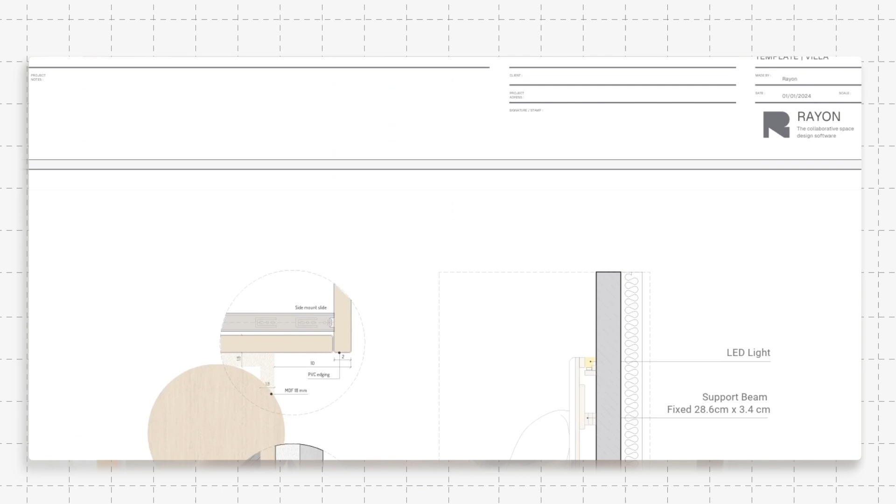So whether you're trying to sell your clients on your ideas, whether you're trying to describe to a millworker what exactly you want created, or if you need a full drawing set to send to the contractors, I can help you along this journey. I'm going to be going through a partial millwork drawing set, and we're going to be looking at the components of this drawing set. I'm going to show you the sections, I'm going to show you the mood boards, and I'm going to give you a little bit behind the scene actions when it comes from the perspective of bedroom millwork.

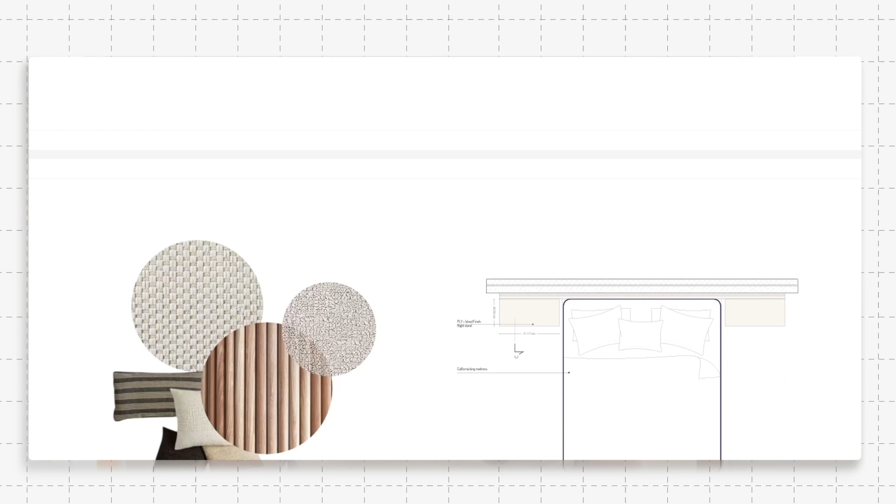Hi everyone, my name is Daniela and I'm a designer based in Toronto. However, I've taken on many different interior design projects around the world. So I like to say that I have a very holistic view on interior design in different spaces as well. And one of the most design sensitive areas in the home, no matter who you're dealing with, no matter what part of the world you're in, is the bedroom. You see, people obviously spend a lot of time in their bedroom. It's a very important place. And you can get really specific in some of the design choices.

So today we're talking about custom millwork. And that means the headboard, the nightstands, so that means different finishes. It could be different wood finishes. It could involve certain metal finishes. It could involve fabric selections. And you also have to think about the lighting. The lighting is very important in the bedroom to set different moods, as it is in any interior design. But we're going to be looking at the lighting specific to the nightstands. There are really cool options on the market these days.

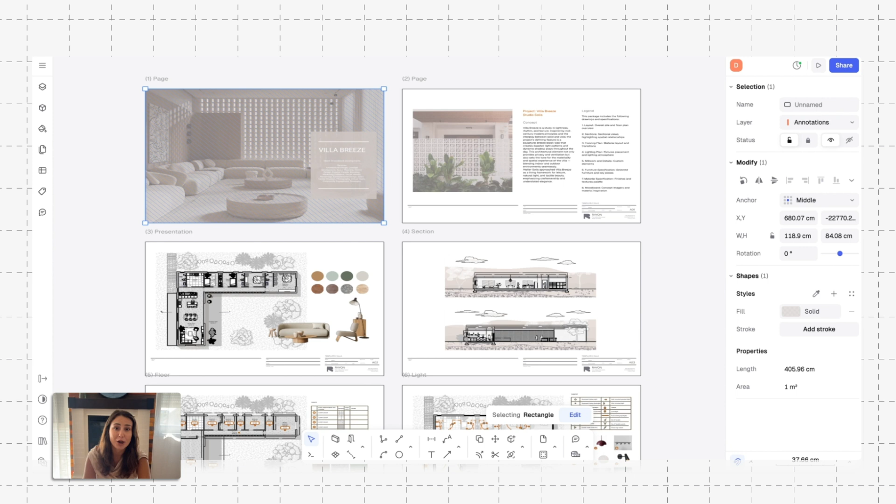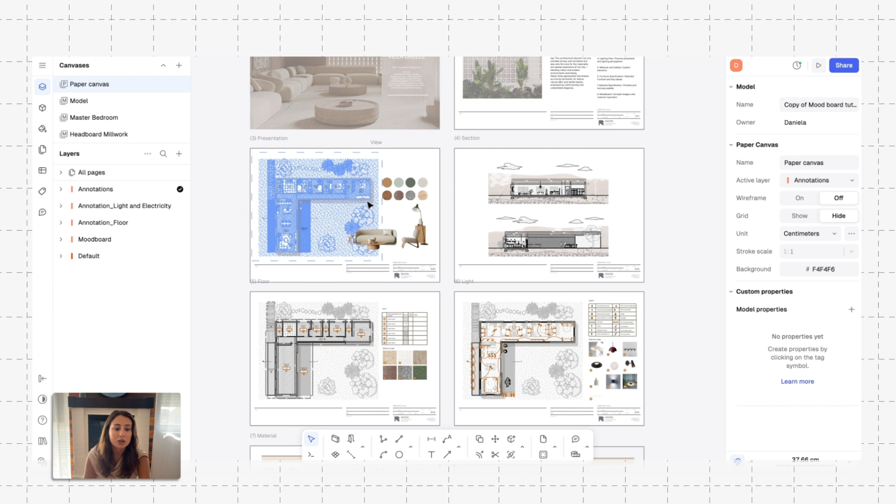Opens up the drawing package here. And while today we're going to be focusing on the bedroom millwork, I want to make note that this drawing set is actually a part of a larger interior design project. So you can see here, we go into our layers and we can see the different canvases that we're going to be looking at. And this first one is called paper canvas. And if you look through the pages here, you can see it follows a traditional drawing set. We have the cover page, we have the legend, and as you go on, you will see more and more detailed drawings. You can see material suggestions, and you can see some sort of style being hinted at.

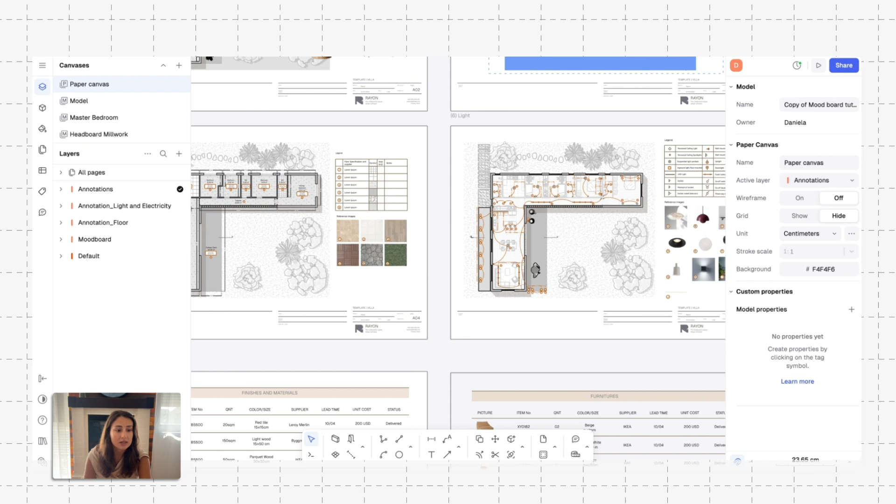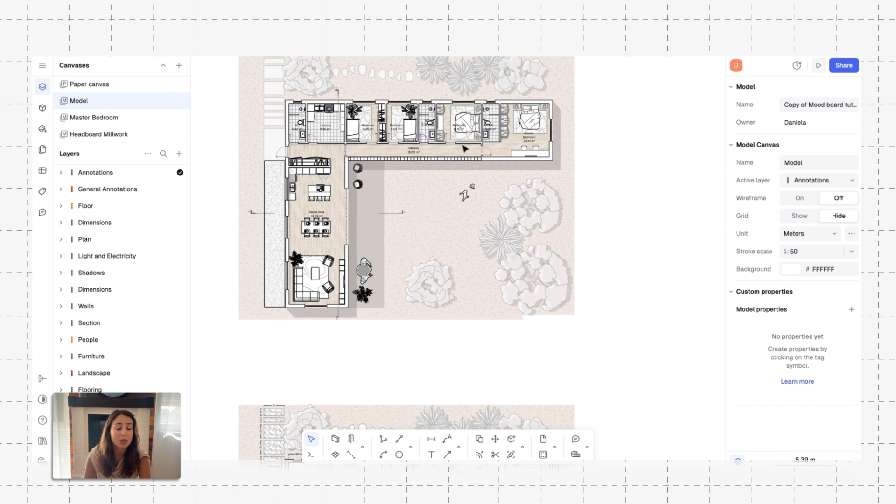Then we can start to see how some of the exterior is going to be looking, and we're looking at a section cut here. We can go further, and once again, we see materials, we see lighting plan, and we start to see the specifications. Let's go to the canvas named model. And we can zoom out here, and we can zoom within each page. And we see here that we have the furniture shown. We're starting to see some materials actually implemented in this layout. And once again, we can start to look at the lighting plan here, which we are going to be looking further into today.

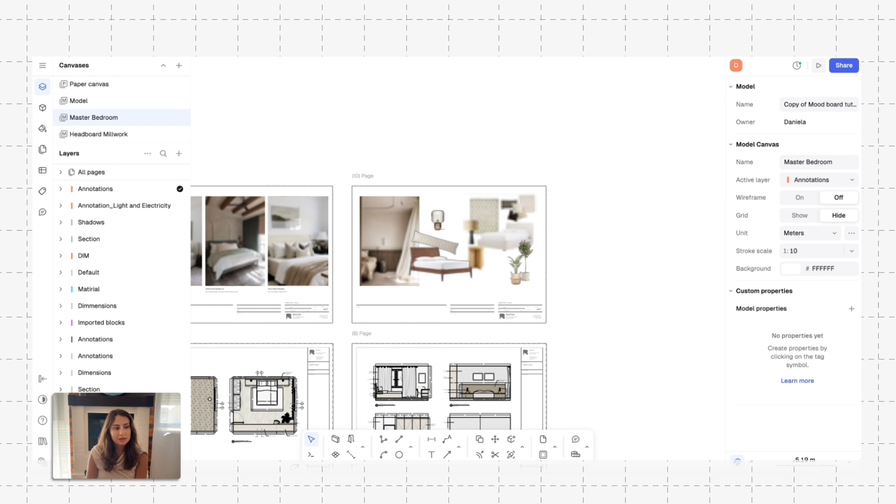And we do get a nice shot of the exterior and a section view of the kitchen and different areas. So now let's take a look at the master bedroom canvas, considering this is our main focus of the video.

Let's take a look at the design intent. As you can see here, it's very earthy, has a little bit of a farmhouse feel. It is very on trend, and I do see a lot of green and sort of warmth coming back into the trend cycle, which I really like.

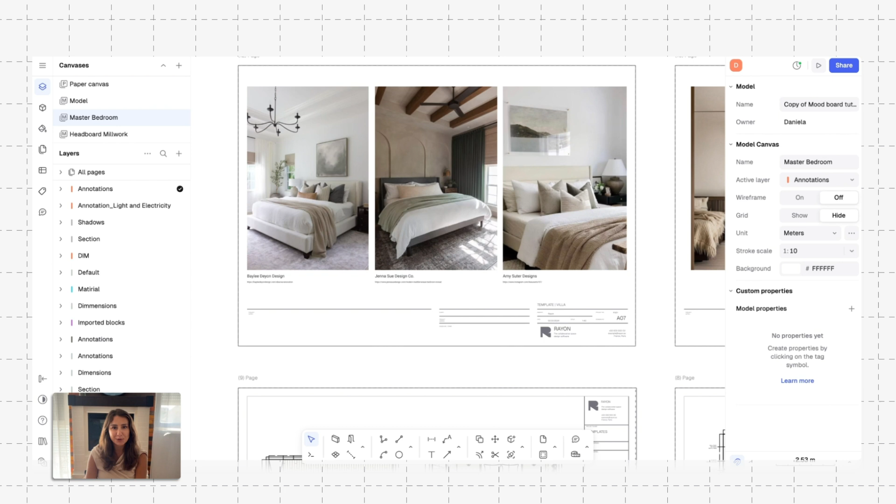Let's move on to our beautiful mood board here that was created in Rayon design. This gives your clients a real picture of the actual items that they're going to be purchasing potentially. Let's start to get more detailed, and we're actually going to look at the floor plan here.

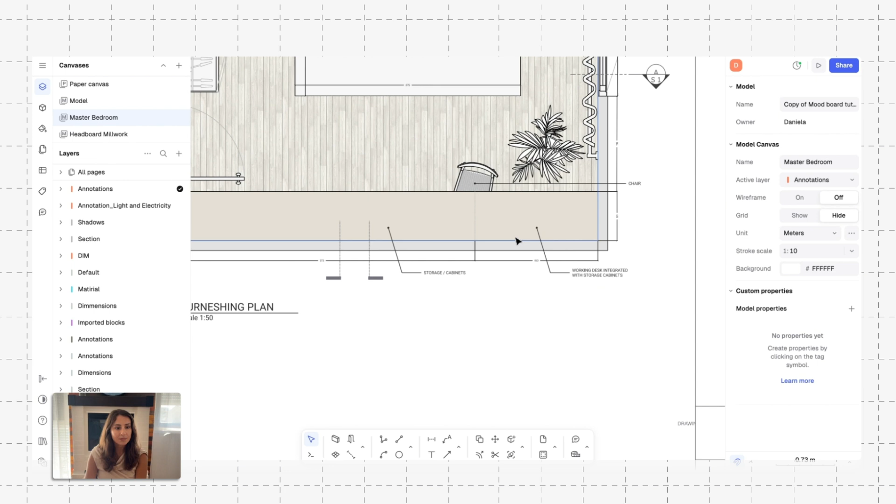And here we have it. So we see our bed, obviously, and the nightstands that look integrated to the headboard. We have some sconces shown. We have our other furniture shown. It looks like we have even a working desk integrated with storage cabinets. So there's actually a lot of custom millwork going on in this bedroom.

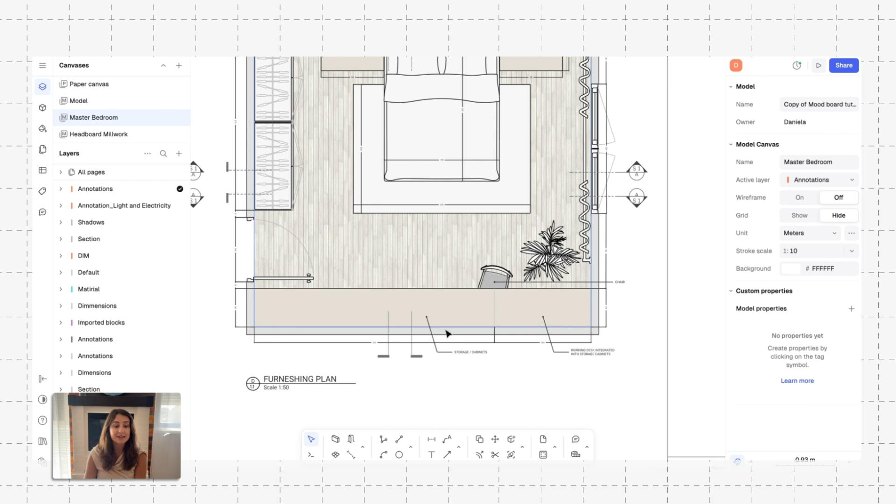And this is sort of, it has this sort of vibe of a very high-end hotel, which, I mean, who wouldn't love that? So let's keep looking.

I'm gonna zoom in on the bedroom elevation too, because it gives you a very clear picture of this design. So we have a headboard in natural wood veneer. We have outlets and switch cutouts. We have side shelf. We have our sconces here.

And this is very clever, and it streamlines the design. You know, having a lamp that sits on the nightstands, it's fine, it works, but it's taking up a lot of space. So when you're doing custom millwork, you want to be clever. And this is a brilliant way in order to free up the nightstand and create a little bit more of a sleek design. So I love this feature.

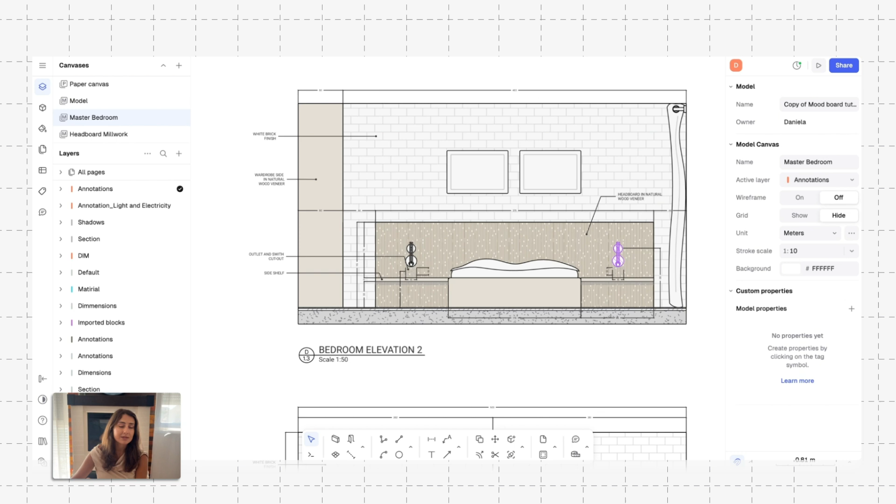We have white brick finish. We have some art suggestion placement here.

Let's keep looking. So here, wow, this is cool. So we have an integrated desk, if someone wants to use it as that. And it looks like we have some cabinetry here, which is obviously fabulous for storage.

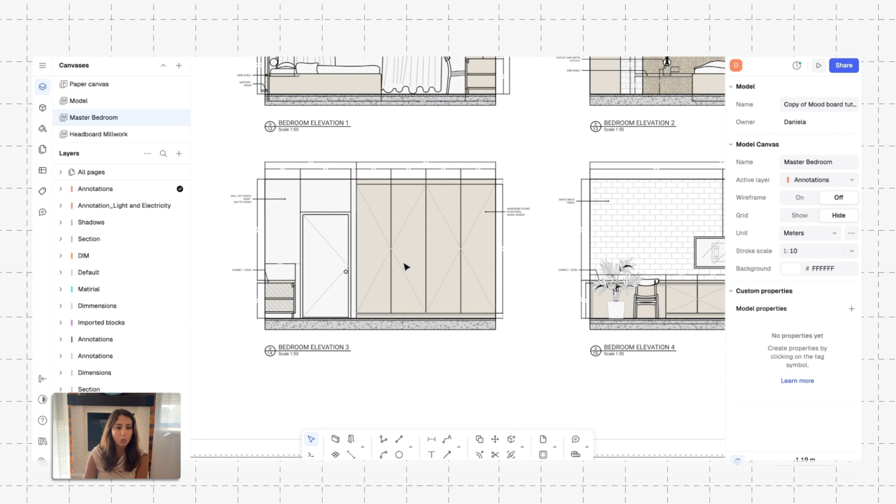And we have our wardrobes, again, all in the same finish. We'll get into the details soon, but that just sort of gives you an overview of all the millwork that is going into this bedroom.

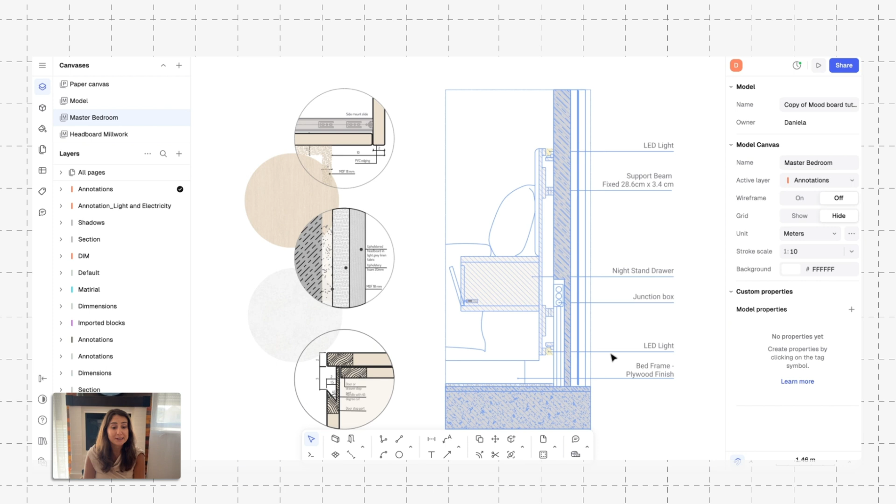You can continue on looking through this canvas, and you can see how all the details are outlined here. And we can look here and see how this is actually going to be constructed and installed. We can also see that there's going to be integrated LED lighting, which is amazing.

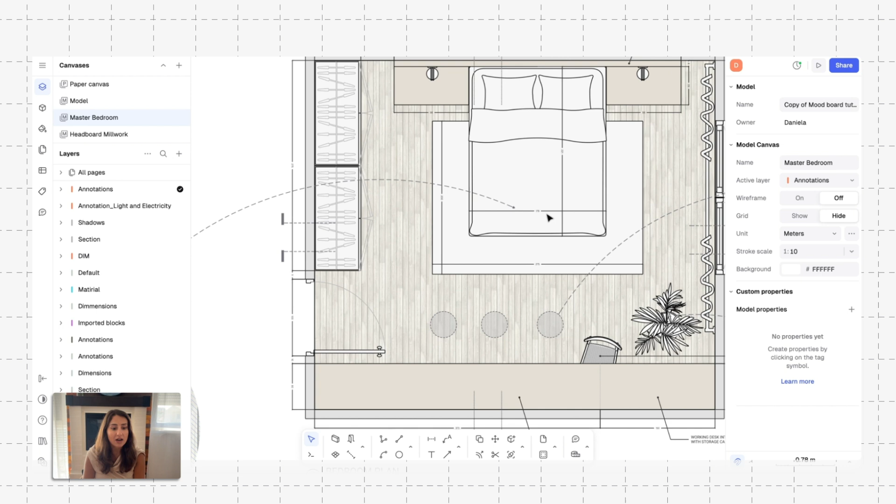And obviously this is very important for your trades. And once again, we do have our specification sheets, which shows each item, the item number, etc. Lastly, in this canvas, we have our finishes, our colors, and we have a beautifully created layout that actually shows material.

So I've selected the last canvas here, which is the headboard millwork, which is where we're really going to dive into the details of millwork design when it comes to the bedroom.

And when it comes to the headboard in the bedroom, that's sort of the star of the show. It is the main focal point 95% of the time. So what that means is that the material of the headboard is very indicative of how the design is actually going to look and feel.

So of course you can do an all wood headboard, and that is a little bit more of a streamlined approach. It has a little bit more of that Scandinavian look at times. It could be more rustic, it could be just more contemporary and sleek.

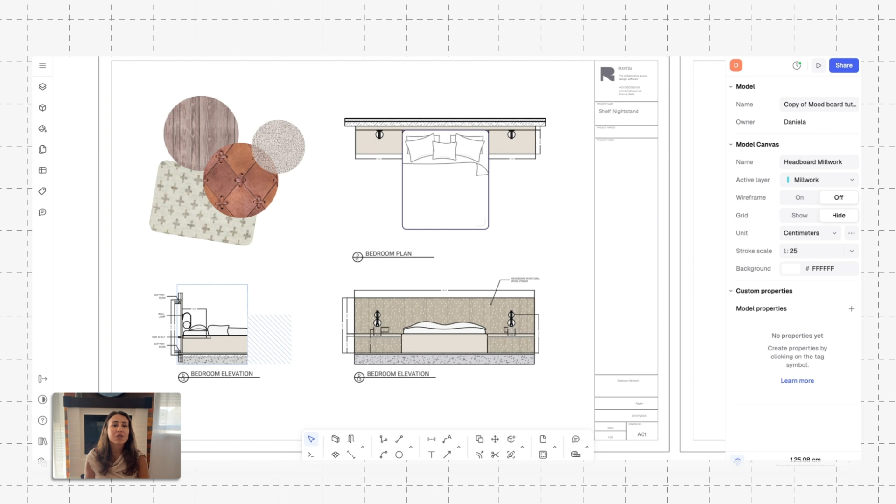Obviously, you can also implement a fabric as well, which not only brings comfort, but it brings a different visual look. So oftentimes people love to add fabric to the headboard.

The bed is sometimes used as an office. So people like to sit in their bed and their headboard will offer some sort of back support. And I do this, and I'm not saying it's the best setup in the world, certainly not ergonomic, but in design, we actually have to design for what people actually do, how they use their space, not a perfect world where no one works out of bed.

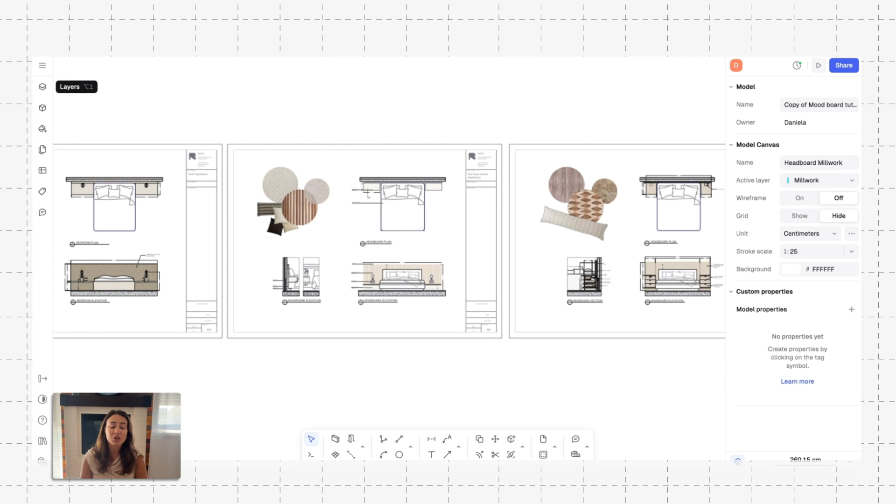Anyhow, let's use Rayon to actually change the fabric and materials of these headboards pictured.

So let's zoom in here. We can just click on this natural wood veneer, and it's very easy to change. We can go to fill and look at all of the different materials in this model, and as you can see, these are different patterns in a hatch style.

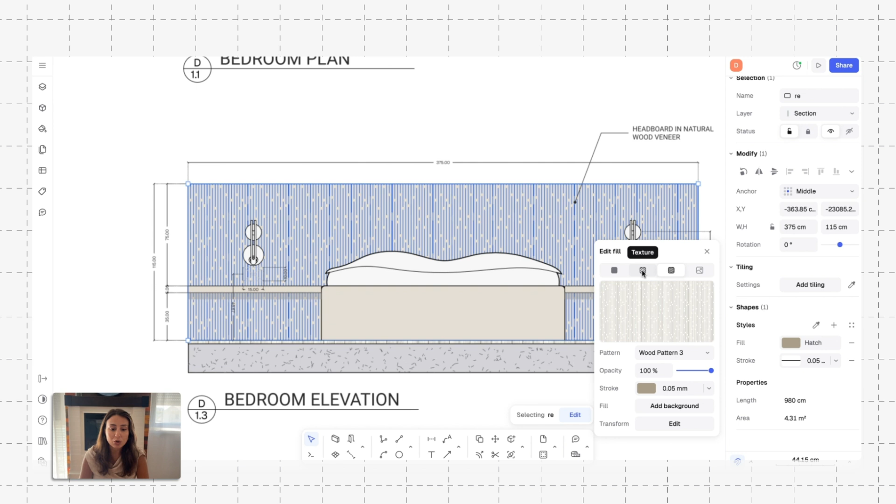I can also go to texture and take a look at the different textures, which obviously look a little bit more realistic. And I can even do a solid fill if I wanted. But let's go back to texture.

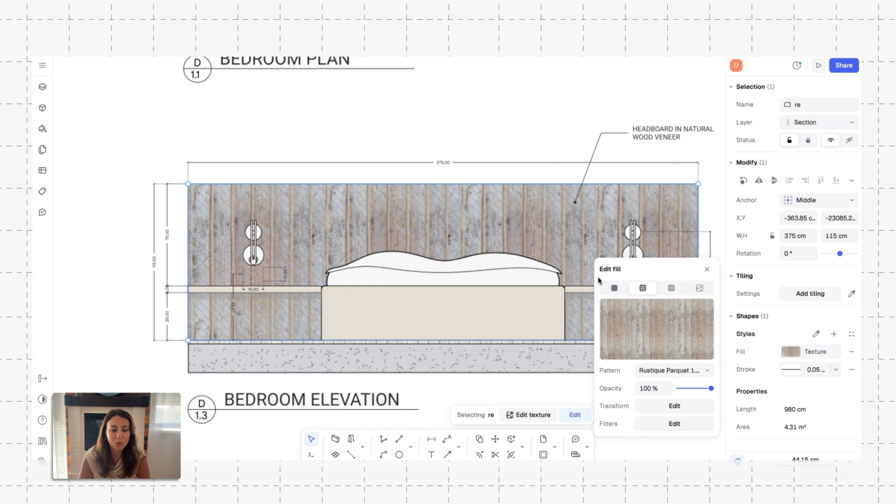I want to change it to a different wood, and I've changed it to this rustic parquet wood. That completely changed the look, but it's kind of cool.

Let's try another material. Let's import a photo of a fabric and even indicate on our drawing this fabric type. So let's select what we have here, and we are going to change this.

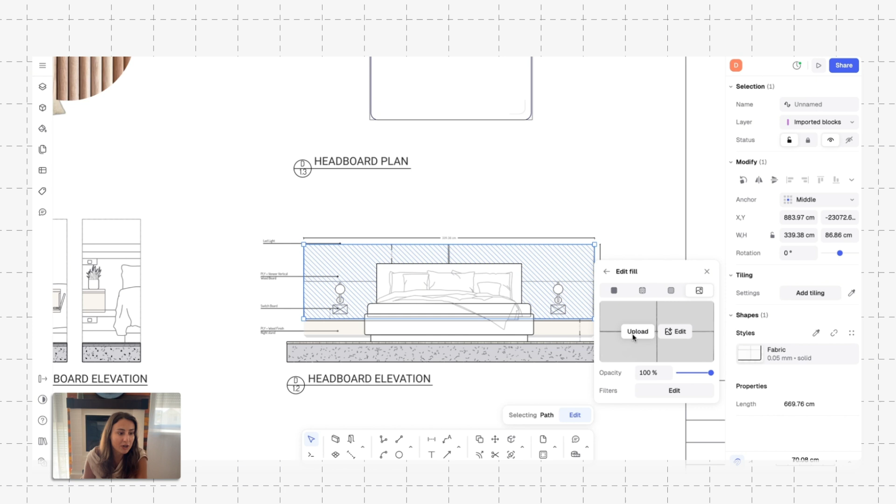So we're going to create a new style and I'm just going to type in fabric. I'm going to add fill, press image, and upload the image of my choice. As you can see, it has already been applied.

So now that I've changed the fabric, let's actually add a leader. We have to delete this, this is no longer valid. Let's just delete the whole thing so I can show you how you can add your own label.

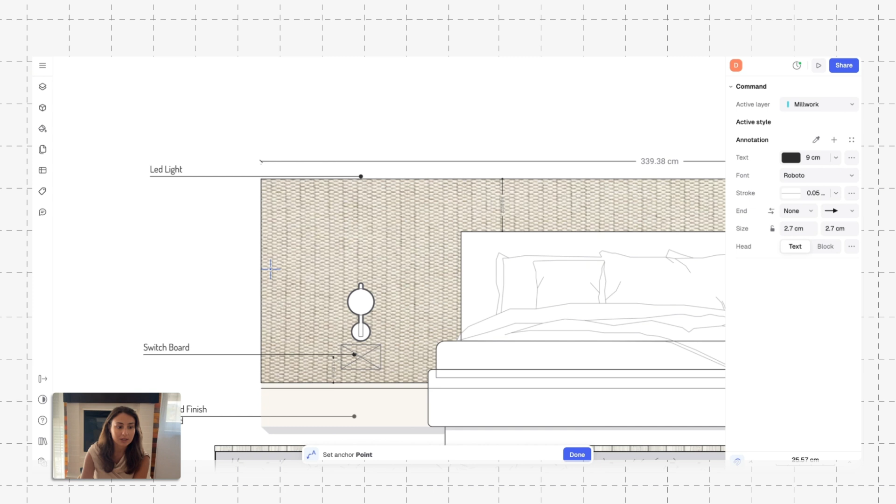It's very easy, as you can see there is a leader tool, and I can just click and use the guidelines to create a new leader. I'm just going to write: fabric, sand, color, 345. Obviously this is really random, but you get the point.

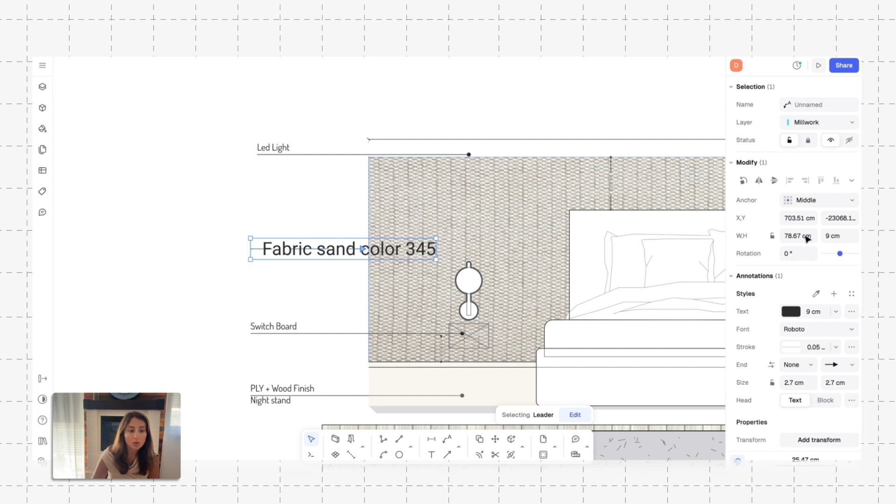So I've added that. As you can see, this leader doesn't match the others. So I'm going to select and actually copy the style of the other leader, and you can see that it automatically did that.

Now I'm actually going to select the text here and change the style so that it matches the other style. I've shown you how to change different textures in your drawing so that you can create a wood headboard, a fabric headboard, or maybe a combination of the two.

So now we're going to move on to lighting. Lighting is very important to coordinate well in advance. You need to make sure you're aligned with your lighting consultant if you have one on the job. You also need to make sure you're coordinating with all of the trades, the electrician, the millworker. They need to work together to make it happen.

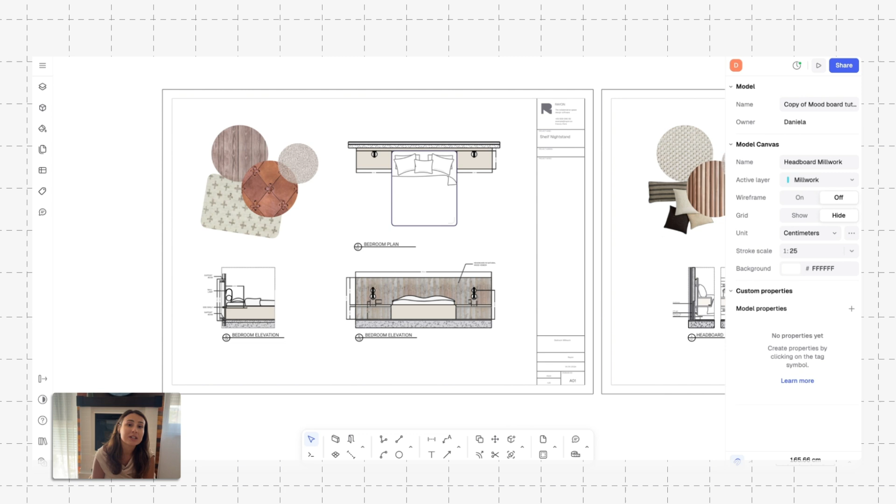If you're doing something like what this bedroom is suggesting here with their lighting schemes that we're going to look at in a second, I want to make note that Rayon has an amazing block library with over 10,000 blocks, lighting included, so that you're able to very easily add different types of lighting fixtures into your drawings.

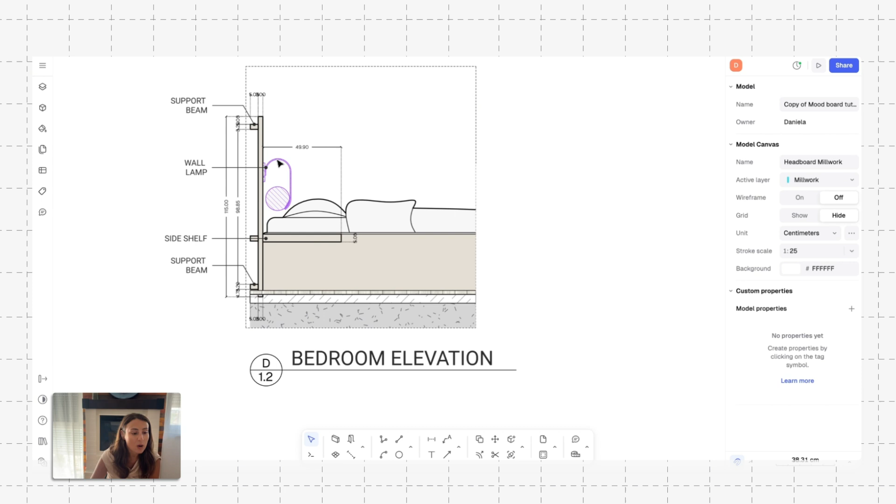So we can look here at our first drawing and we can see that sconces have been specified. We can zoom here and see the side view in this section, and we can see how everything's going to be constructed.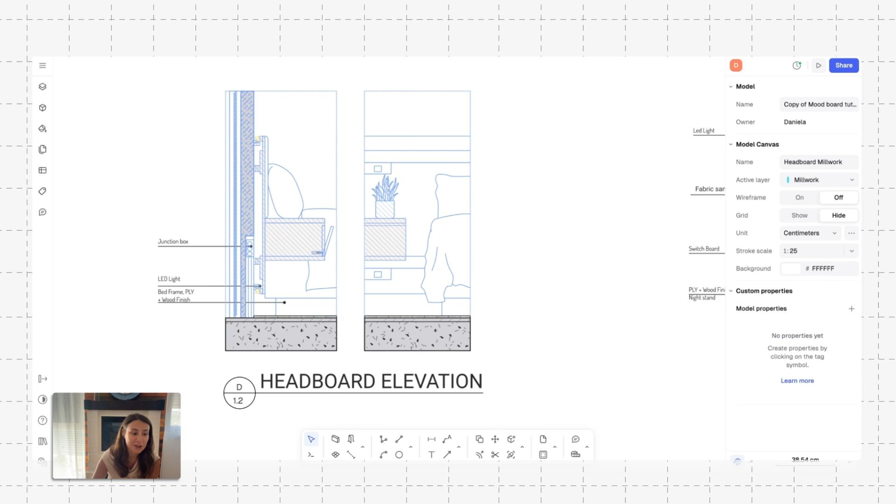Let's look at the third option here. This looks like it just has LED lighting along the top, which is specified as an LED strip. So it's going to light up that whole top portion and really create an accent feature.

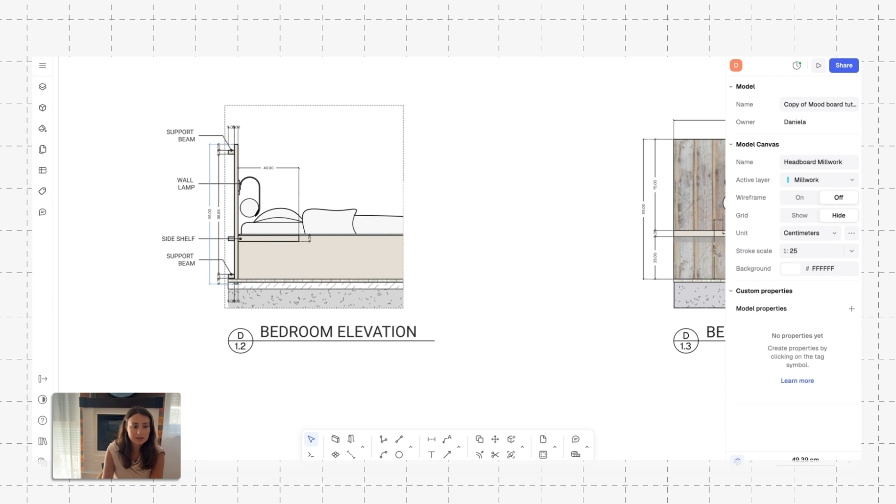Let's say that I want to use Rayon's block library to replace this sconce here. I can do that easily. So I've clicked blocks and typed in light, and I went to the library, which has over 10,000 blocks. I could spend all day in here if I want, but for the purpose of this video, I'm going to show you how I replace this light here.

So I can just click and drag, and I can delete this sconce. Let's say I just prefer this one. I can drag it to the wall, and of course we need to verify location, but for the purpose of this video, let's say that we're happy with that. As you can see, it was very, very easy.

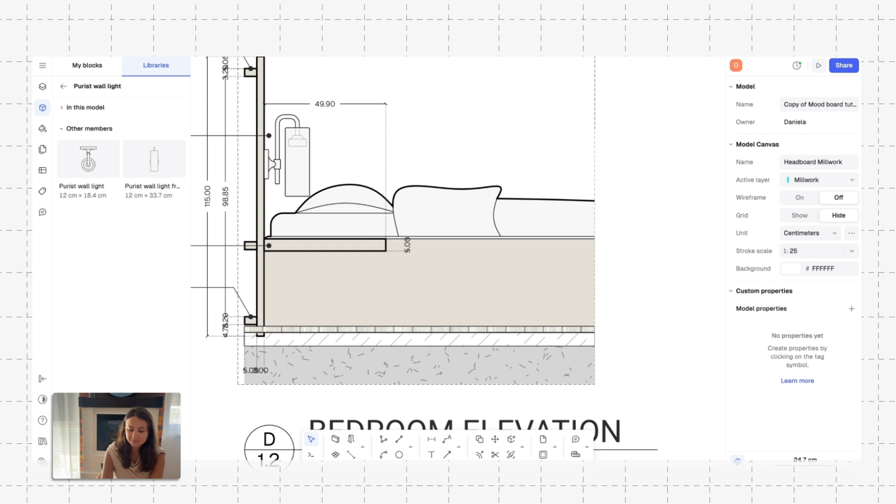Let's talk nightstands. Now, nightstands are a very important element in the design, and we've seen a few different styles looking for this drawing package, but let's get a little more detailed. So if we can see here on the first drawing, we have a shelf style, which is very minimal, doesn't offer storage, but it is a beautiful design feature and your client may be after that look.

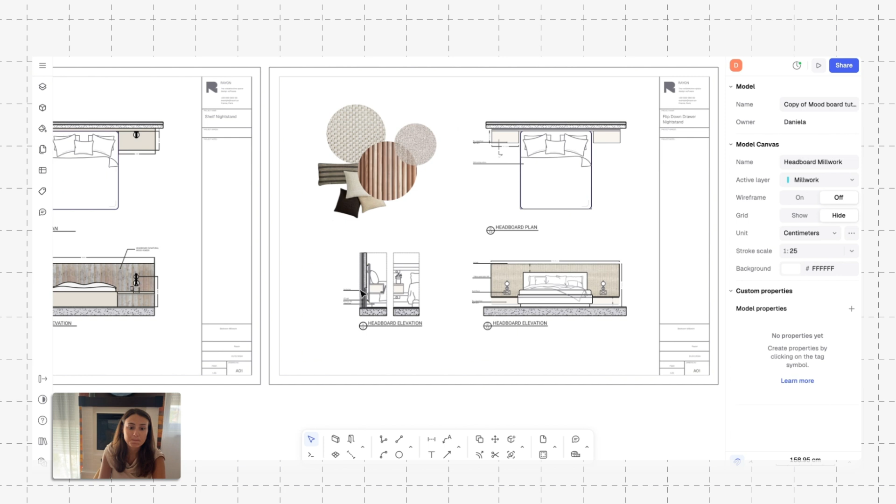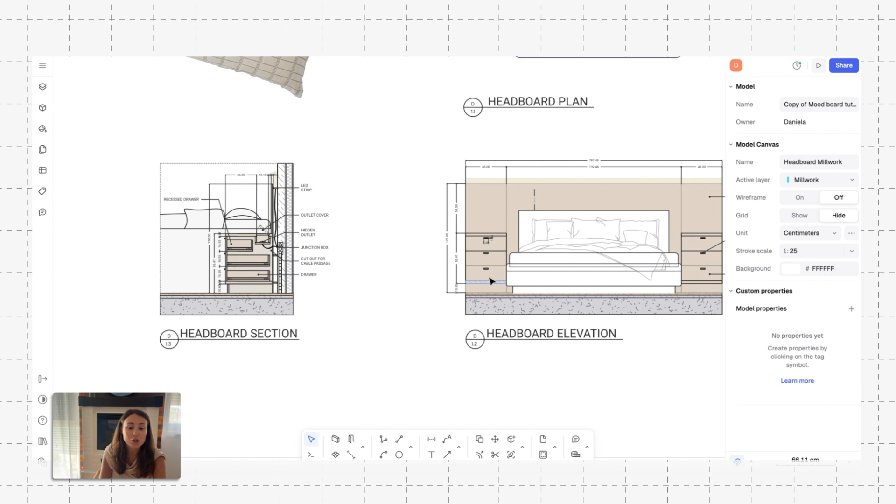If you still want that minimalistic look but you need storage, the second option is the flip-down nightstand. It has that hinge feature and hidden door, so you get the best of both worlds, sleek but functional. The third option is more traditional, with that furniture look - it's the drawer nightstand, which I love. I'm not opposed to that more traditional feel, and I think people really appreciate storage. So you have 3 nightstand options to consider from this drawing set.

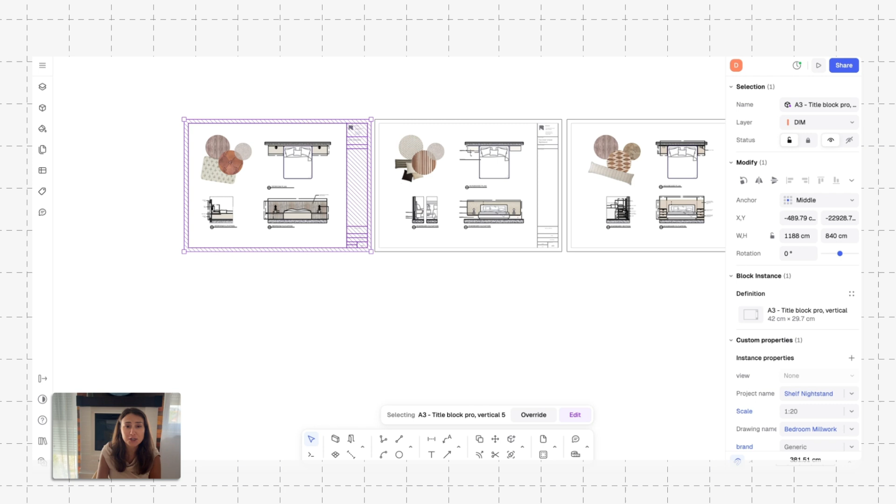With Rayon, you're very easily able to duplicate a drawing set or a model and make changes to it, so you don't have to start from scratch each time. Let's say I want to duplicate this model - I'm going to go up here and press duplicate model.

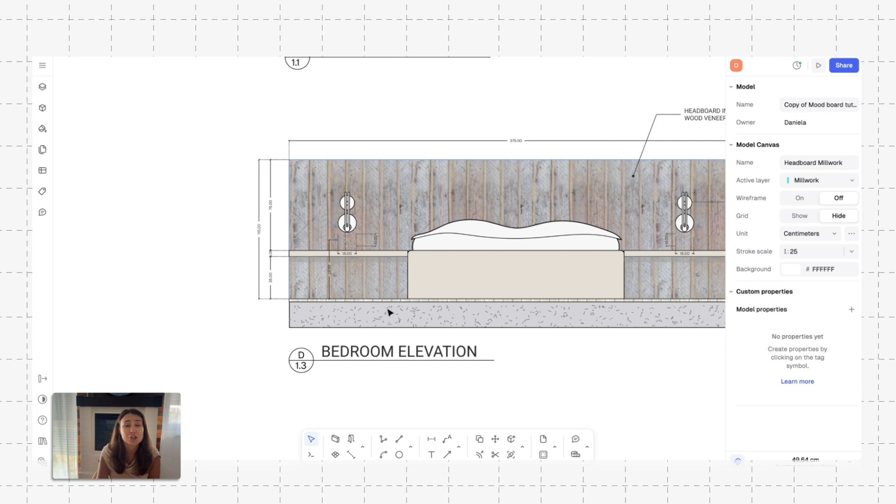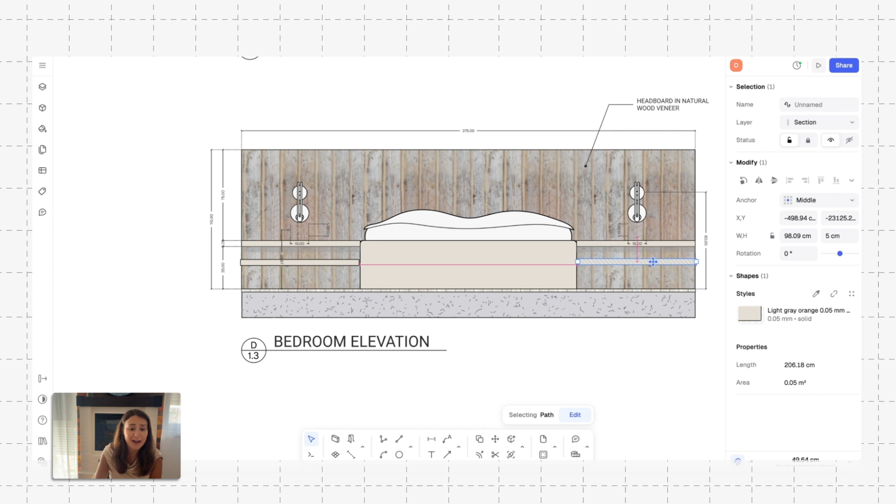Once you have your duplicated model, you can change up the design on that one. I know us designers, we always like to test out different things and may not want to work on the current drawing set that's shared with others. So if this is my duplicated drawing, let's say I want to alter these nightstands and double up this shelf. I can hit copy paste on the shelf and place it here, and I can even duplicate that again on the other side. So now I actually have a 4th option for the nightstands here.

When it comes to presenting to your clients, you want to make sure you have beautiful images, reference photos, pictures of the materials - anything that's really going to grasp their attention and give them a real, accurate sense of how their project is going to come together.

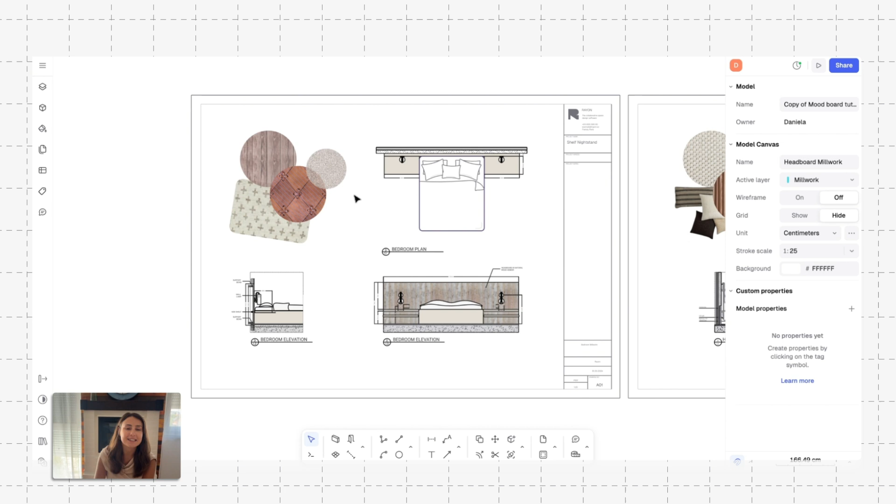With Rayon, as you've seen, it's very easy to import photos, create little mood boards, and give that to your clients to review. You can also easily share your drawings with your client or team members, and I'm going to show you how you can do that.

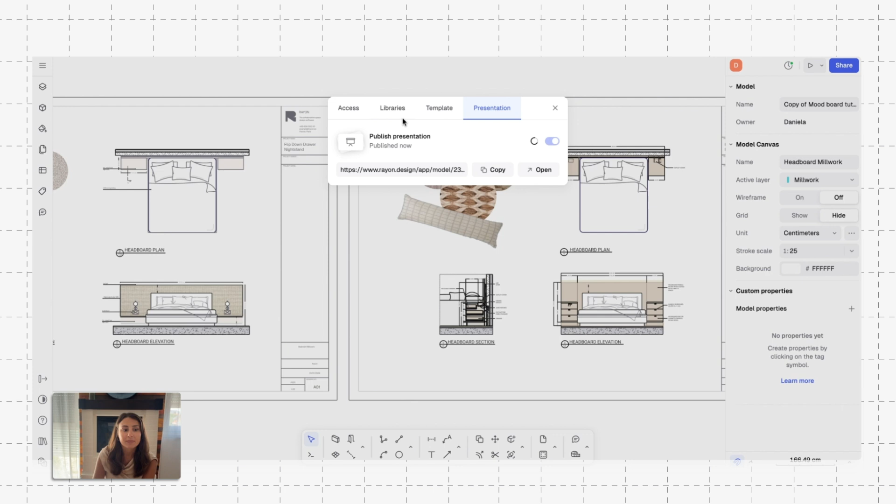All you have to do is hit share, and it gives you different ways to share. If it's your client, you probably want to do presentation mode - toggle this on and just send them a link, which is super easy. You can also invite someone by email - just hit access and type in their email. As you can see, Shira from Rayon is already added here, so that person would be able to edit or just view, whatever you choose.

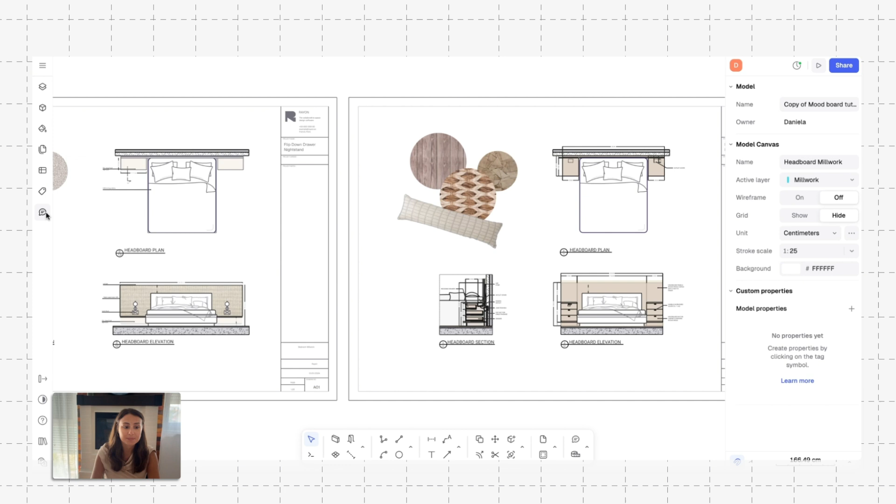Next, I'm going to show you how we can add a comment - it's very intuitive, you just hit this little comment box. I want to leave a comment on this design here: I prefer this design intent, so maybe I want to let my team know that I like this the best. I like this direction - let's share it. As you can see, there's this little chat bubble and my team can view what I said and even respond.

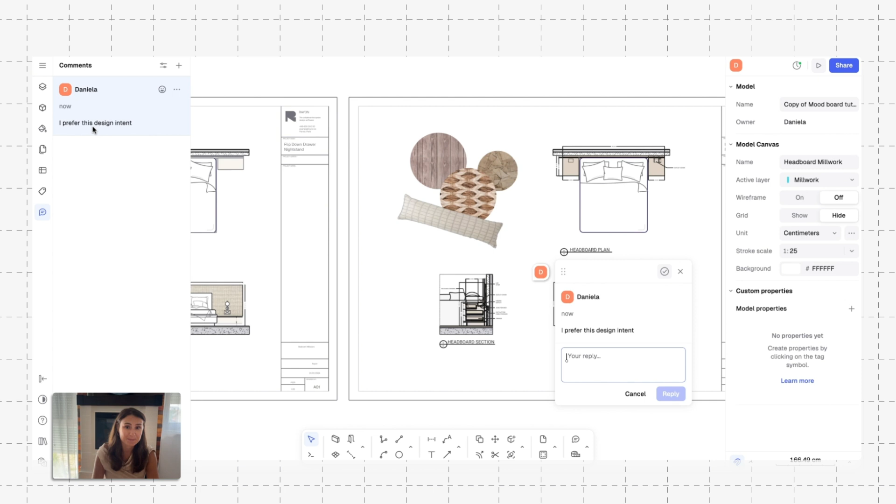Custom millwork is where design and detail meet, and you know what they say - the devil is in the details. That's very true when it comes to millwork design. In the bedroom, it's crucial to make sure the headboard, the nightstand, and the lighting integrations are all well thought out in advance, to make the most powerful presentation to your clients and get that yes.